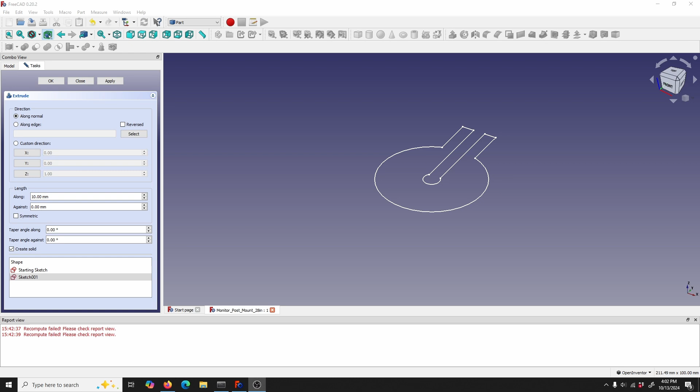Hello. In this video, I am designing and 3D printing a light mount to go on top of my Acer monitors. The monitors have these aluminum posts that are ideal for mounting things other than the monitors themselves, and I wanted to make these adapters so that I can have 1/4 screws to mount some lights.

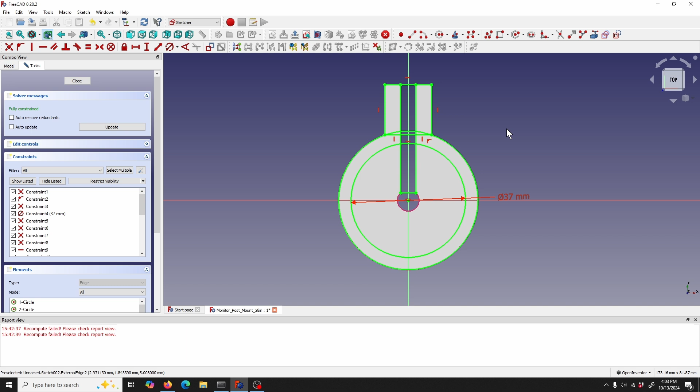The idea is to make my setup clean so that I don't have so many posts and rods sticking everywhere. So what I'm doing is drawing a sketch that I will later extrude.

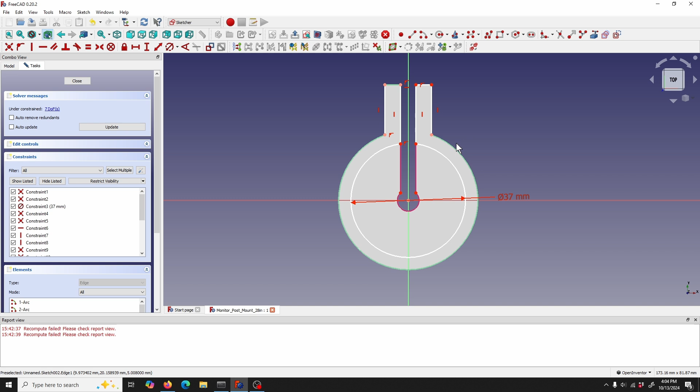I'm using FreeCAD because I don't want to spend the money on Autodesk or SolidWorks. I don't have a salaried job at the moment, so I will use what I have access to.

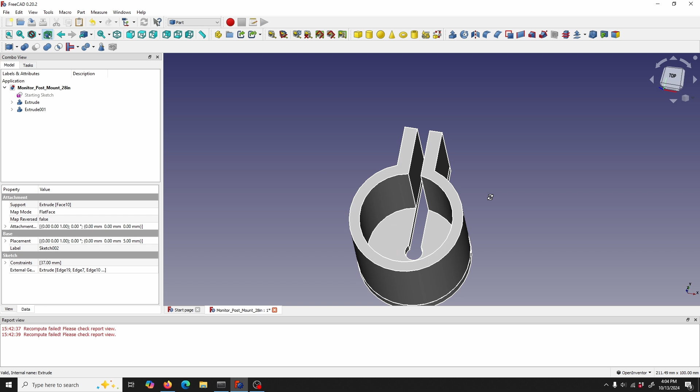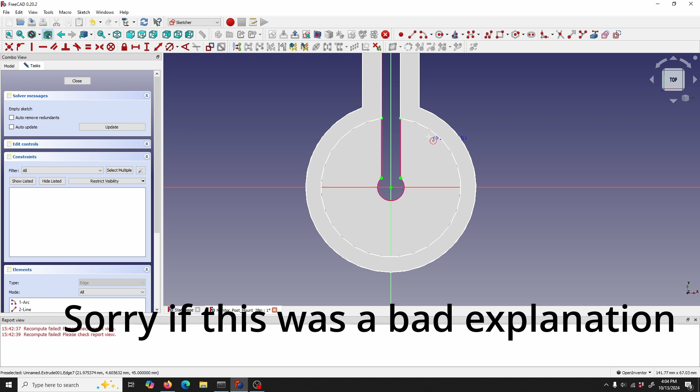FreeCAD is pretty good for simple designs like this. There are some features missing that I would have liked. For example, if you wanted to extrude a complicated shape, you have to draw a closed loop. You can't have any intersections or anything like that you could have in Autodesk Inventor or Fusion, where you have the freedom to select subsurfaces to extrude. In FreeCAD, you have to cut things out and have the shape exactly as how you want to extrude it.

So here I am trying to extrude an area where the socket head of a 1/4 screw would sit inside. That way, when it rests on top of the monitor post, it is flush.

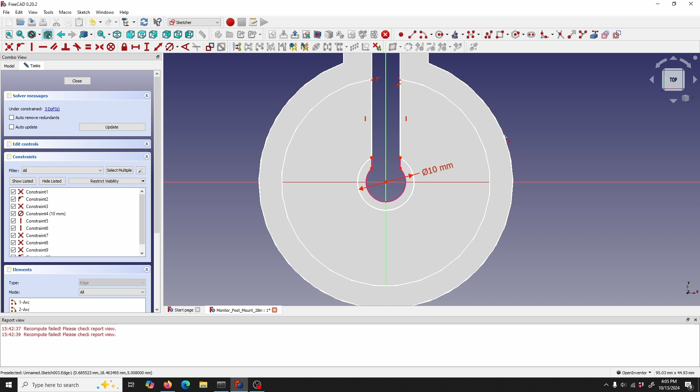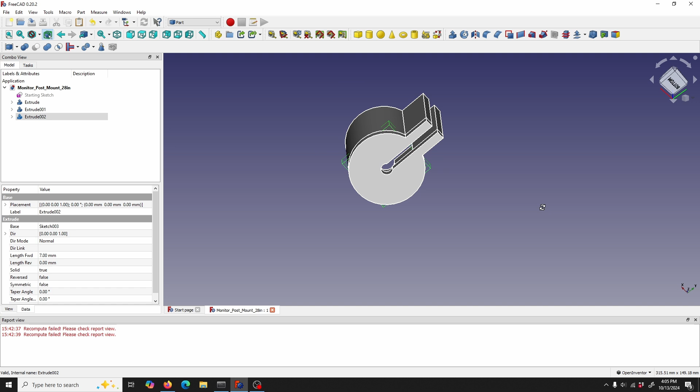Once you've extruded, you have the option to change how deep the extrusion is. And that looks quite nice. Here I'm fusing them together into one part.

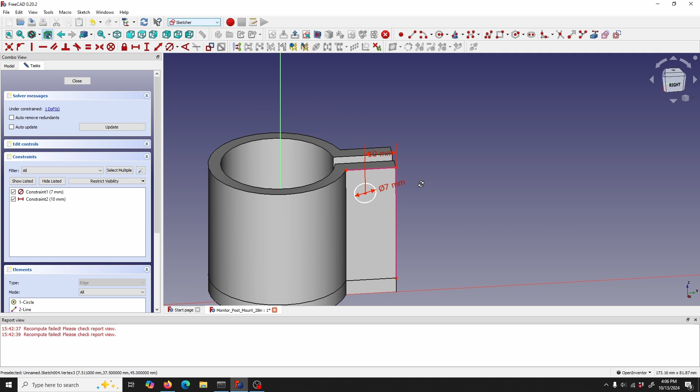Now I'm drawing a sketch of a circle that I can later extrude into a cylinder, and I will use a Boolean feature to cut a hole through this area, and this hole will be used as a place for a 1/4 screw to clamp onto the posts.

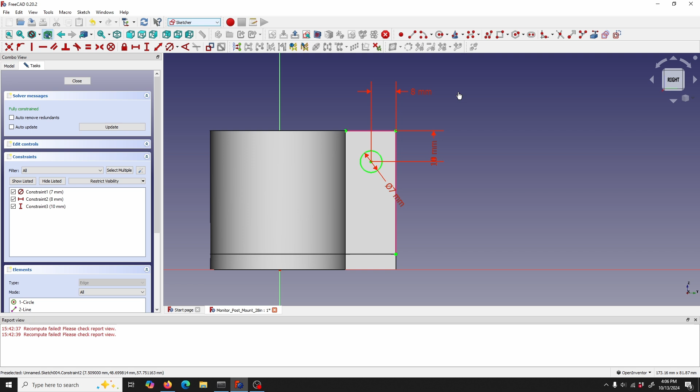Here I'm setting the position of the hole at 8mm, which is about halfway. Right, so now it's cut, and that's the end of the design.

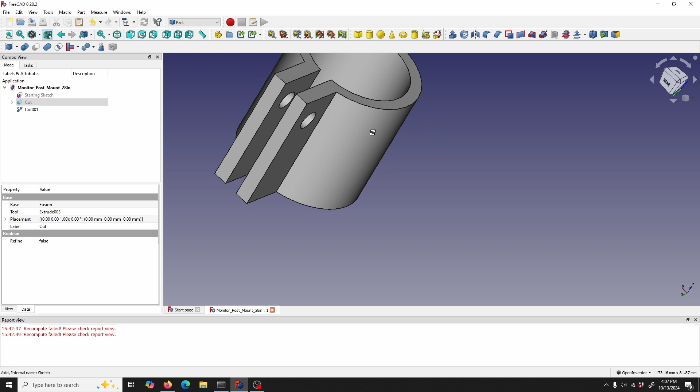The last thing I do is refine the shape to get rid of any multiple parts that really ought to be one, and then I export.

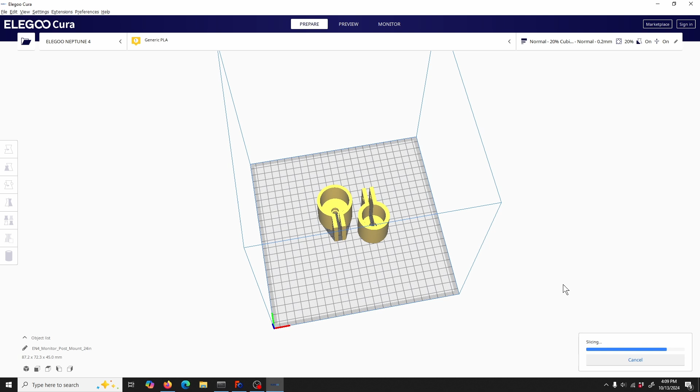So here I have the two parts in Elegoo Cura, which is the slicing software for my 3D printer, the Elegoo Neptune 4. I have two parts because I have two monitors, one larger than the other. I measured out the diameters of the posts in order to have these two designed.

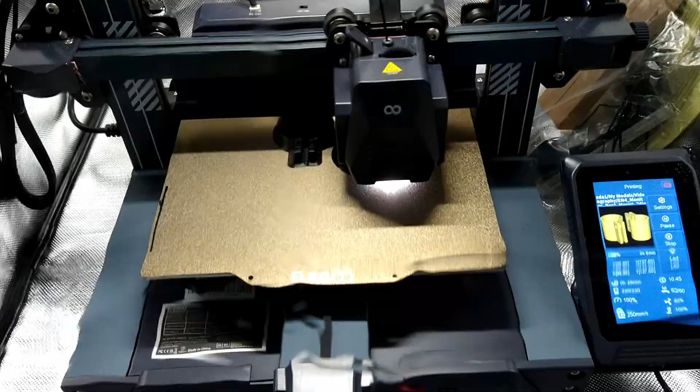And you can slice through the different layers. Now it's being 3D printed. This is a fast 3D printer, and I'm not even running it at full speed.

I think once you start pushing it to its limits, you have a higher chance of printing failure, so I kind of keep things moderate. Now it's finishing up.

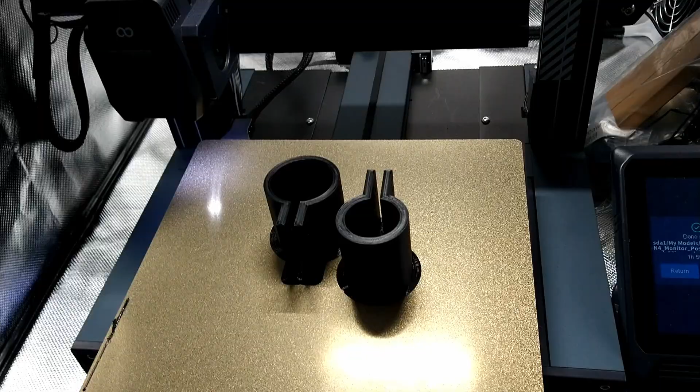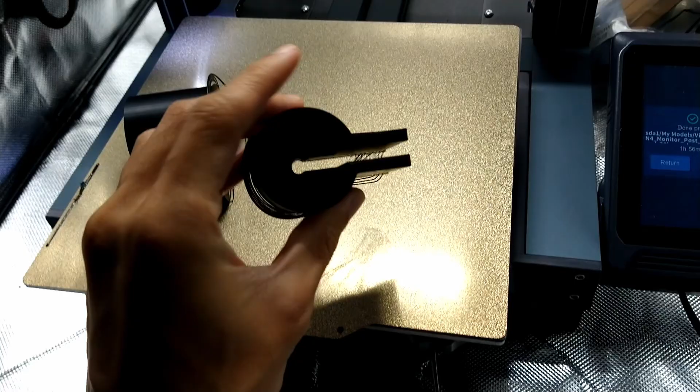I have my 3D printer inside an enclosure to keep the fumes contained. It's good for short prints, but once prints reach 3 hours, it's not very good at containing everything, and my room starts to smell.

Alright, second time's the charm.

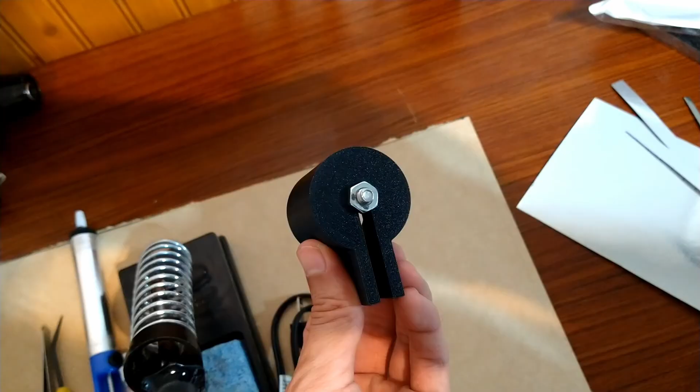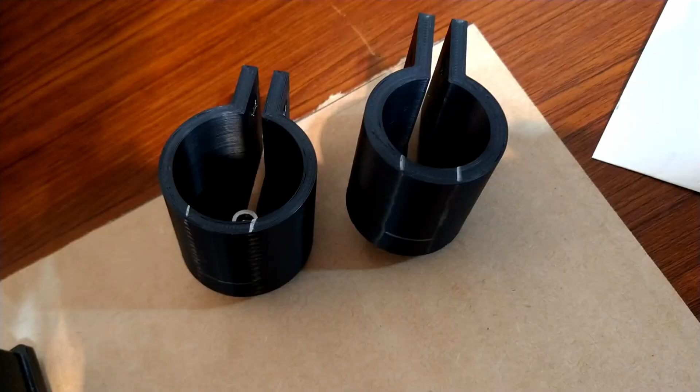As you'll see, there's a problem. I thought the post was a perfect cylinder, but I did not notice these plastic pieces at the back, and so my 3D printed part won't fit. So these things happen, you have to adapt. My solution is to cut out the back to make room for that extra extrusion.

I used a handsaw, a really cheap one. It was a pain in the butt to saw it. I drilled 3 holes and then peeled it off with some pliers. Rather than having to reprint from a new design, I just tried to adapt my existing print, and that way I don't have to waste more time and filament. And now, as you can see, it fits.

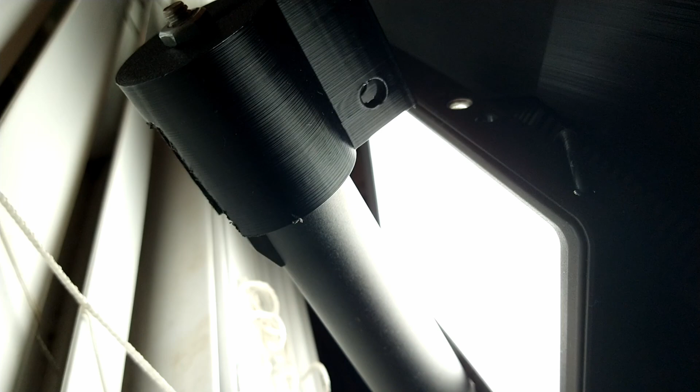And here's the other one for my second monitor. It also had the same problem. I bought these on eBay, 10 pieces per $10. Also this cheap webcam.

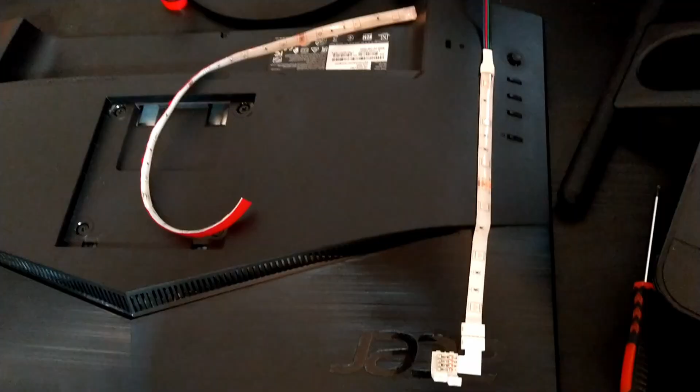So what I'm doing now is gluing some LED strip lights as a bias light for my monitors, because the lights that I was previously using as backlights, I'm now using as key lights.

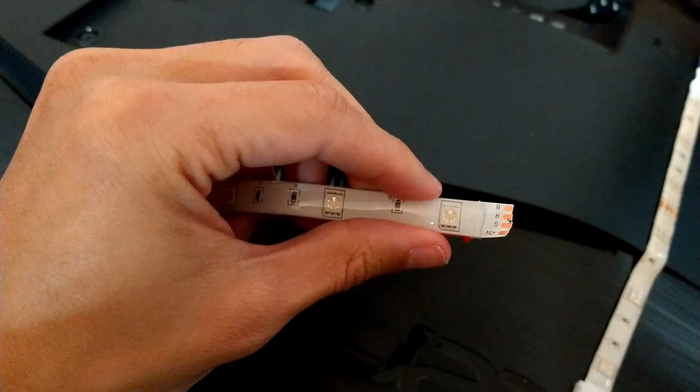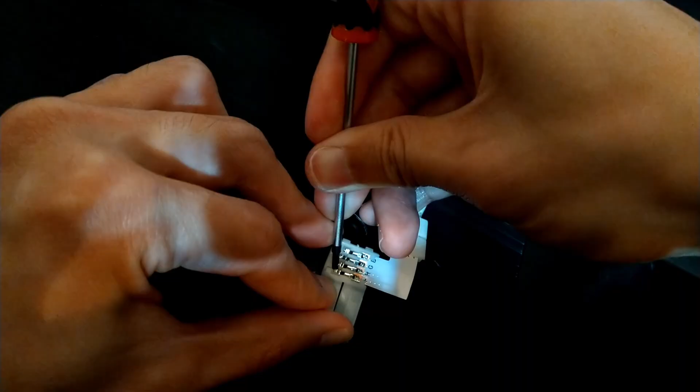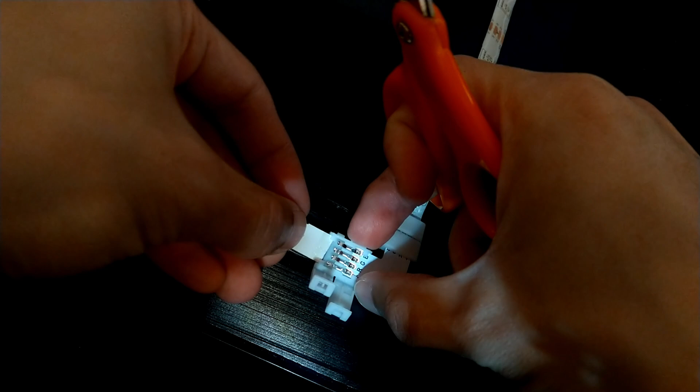So to connect these, you have to peel off the waterproof coating as well as the sticky coating. Then these angle connectors, you have to lift up the contacts with perhaps a screwdriver, so you can slip in the LED strip light contact area. I added a piece of paper as a shim because unfortunately these don't close all the way.

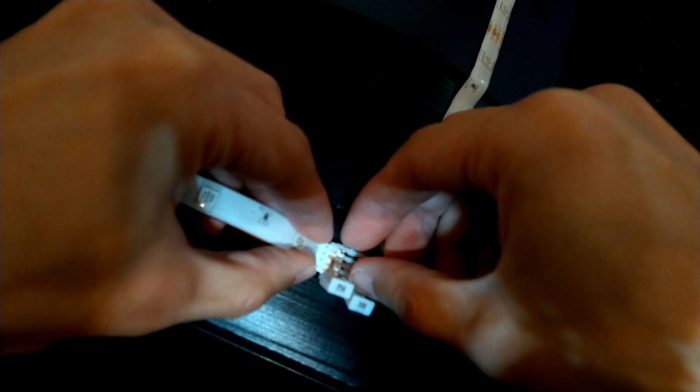But in the end, the shim didn't really help either, but this was an attempt at least to keep things tight. So once it's in, you press down the pins so that they're contacting.

Peel off the... I guess I don't know what it's called, but whatever that's covering the sticky part, and glue it on the monitor.

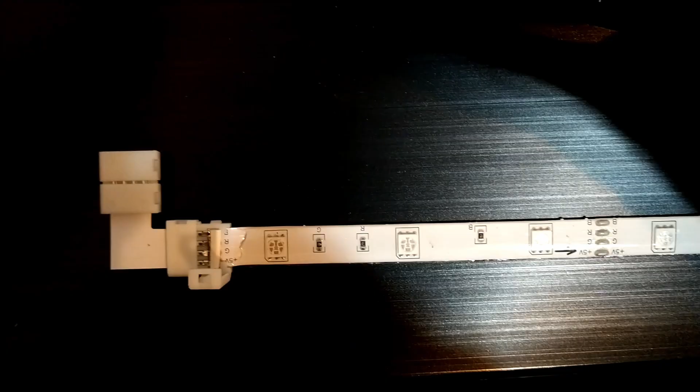Here's the other side. So I have a couple of options. What I could do is cut it here so that it wraps all the way around, but it will cover the sticker that has the information of my monitor. I don't want to do that, so I'll cut it shorter. That way the LED light using that wire will run through the middle.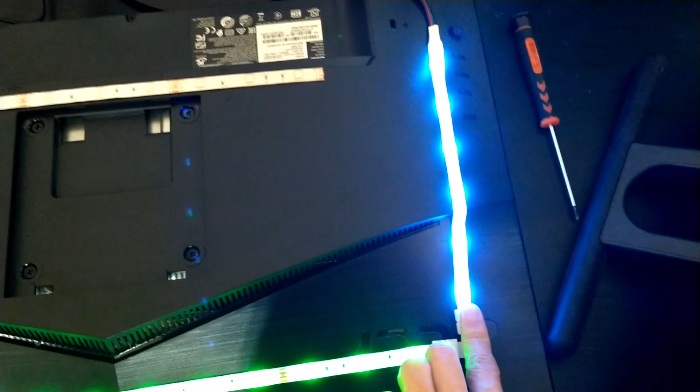There's a problem. The contacts aren't good, so only the first strip is lit up, not the second one. If I tap it, it works, but only intermittently. So I decided to hell with it, I'm just going to solder everything. It was a pain in the ass to solder, so I skipped to the end. Here's the result.

Now it works. Here's what it looks like with my monitor set up.

Now these are rather cheap lights, so I don't expect amazing results. It's just something to get the job done, prevent eyesore during the nights. Here's my little studio lights. They're small, but that's what I have right now.

It's a nice wave effect. I'm gonna stick with a solid light actually. Here's what it looks like with my monitor on.

It's kind of blue, but actually it's supposed to be white. As you can see, all three LEDs, the red, green, and blue, are on, which means it should be white, but it seems like the red is a little weak for some reason. I hope it's not because of my soldering work, although it could be.

So this is what my setup looks like with the lights on. The quality is not that great because I am using a cheap webcam. My digital camera is tied up in business-related work at the moment.